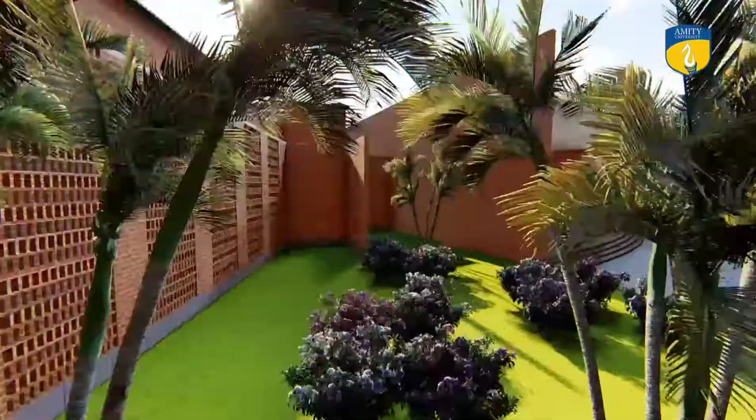My design thesis is about a School of Performing Arts, which is highly demanded in Bihar. Since there are no such facilities in eastern India, this proposed campus is the first in this region. This is not only a school, but this campus shall be catering to all the performing artists of Bihar to perform and also to interact.

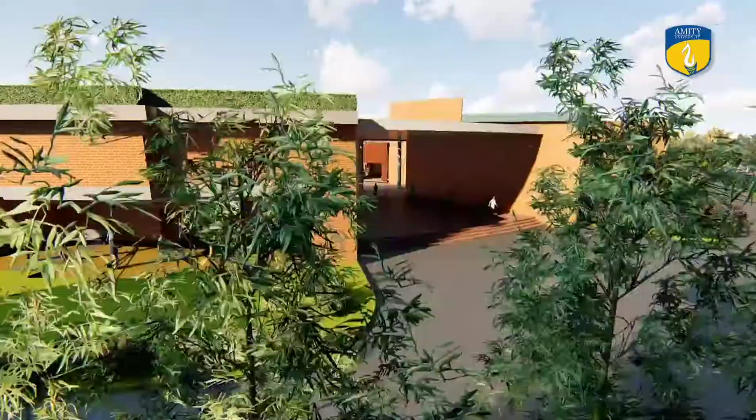Major international and national level theatre festivals, music festivals, and dance festivals can be held in this campus, as well as workshops can be conducted, and apart from that, libraries, archives, rehearsal spaces can be used by the theatre and performing art practitioners at local level.

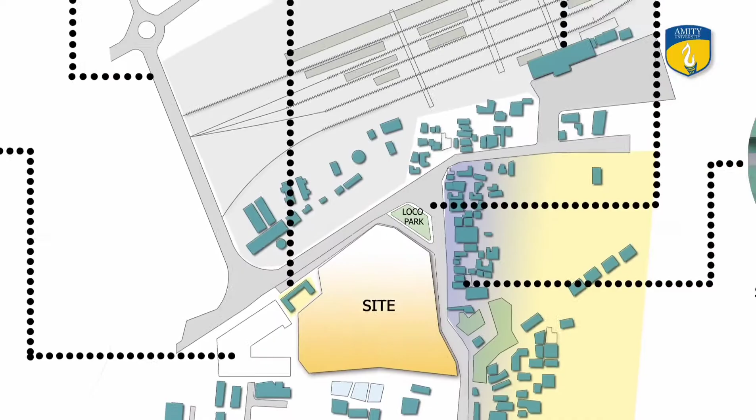Site is located in Patna and it's in a newly developed education hub at Karbigahiya. The main road is on the east, at the north is a flyover which gives a bird's eye view of the site. At the south is a driveway, and on the west, an old power substation. And at the north, an additional road adjacent to the site exists. The slide shows site analysis, sun path, wind direction, approach road around, probability of accessibility to the site.

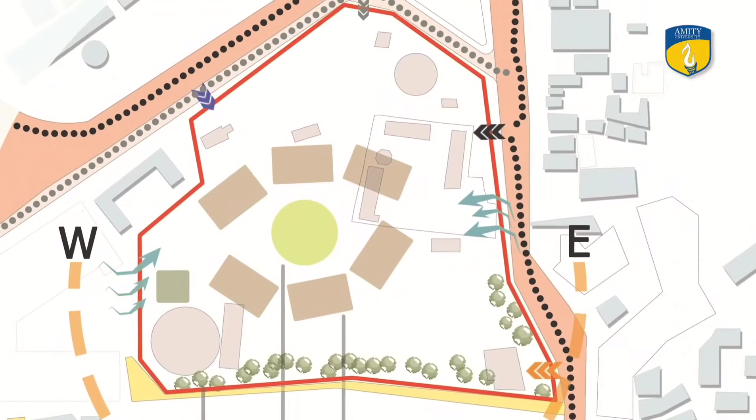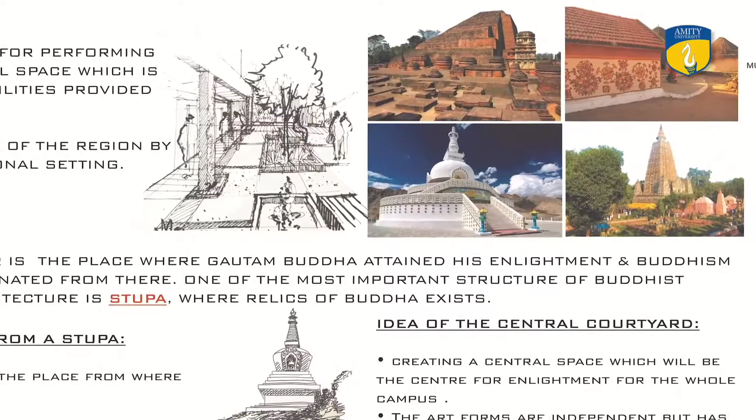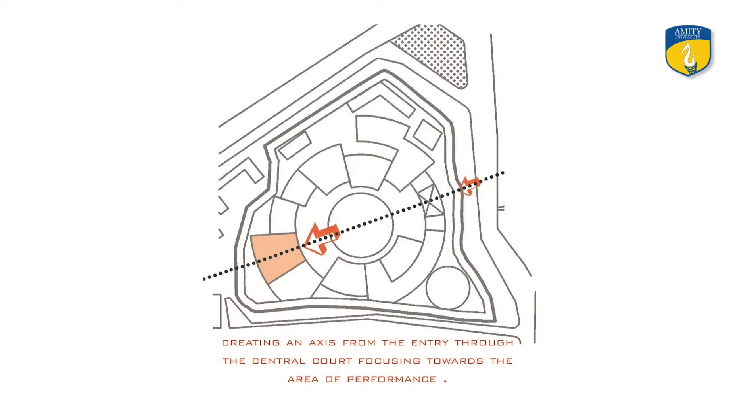Talking about the concept, inferences were taken from regional history, Nalanda ruins, Buddha stupa, concept of courtyards. These elements were considered in the proposed design. Exposed brick from Nalanda ruins, courtyard from the concept of stupa, which is a place, an origin from where the enlightenment begins. These are some design ideas I considered during the design process, like introverted planning, hierarchy of spaces, independent entries to the different blocks, converting negative spaces to positive ones, etc.

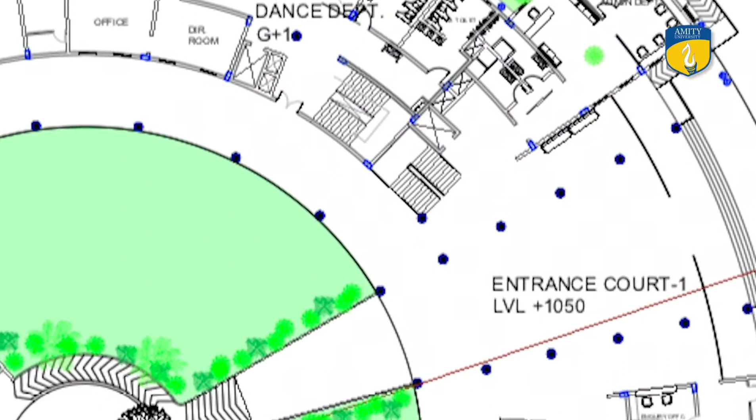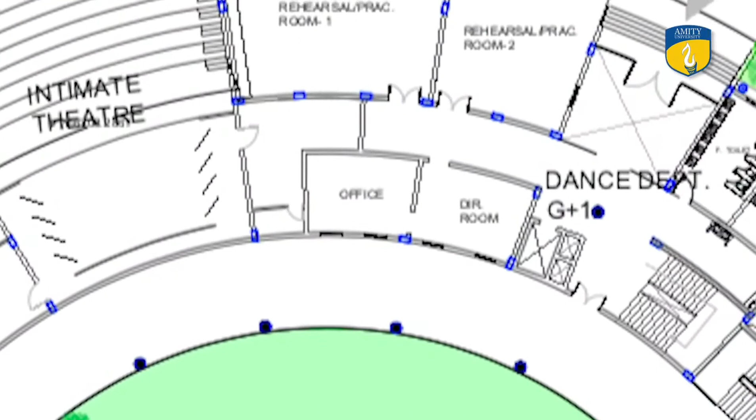This slide shows the basic zoning of the site and the circulation inside the site. Entry from the main road along the main axis is the entrance of the building, along which is the central courtyard. At the end of the courtyard, you can see the open air theatre, below which is the cafeteria connected by a semi-open corridor around the courtyard. This is the intimate theatre, and after that you get another entry to the building outside the block for the dance department. This is all a ground plus one structure building.

There is a two-wheeler parking space, and on the upper side you can see boys hostel, girls hostel, and in between there is a dining space which can be shared by both. This is the auditorium, and this is the entry to the drama and music block.

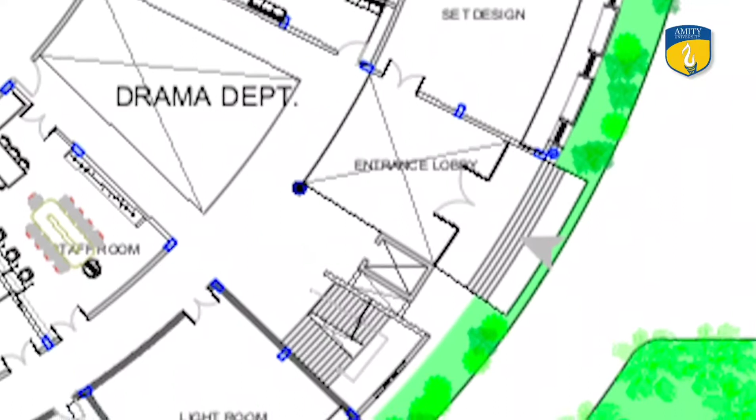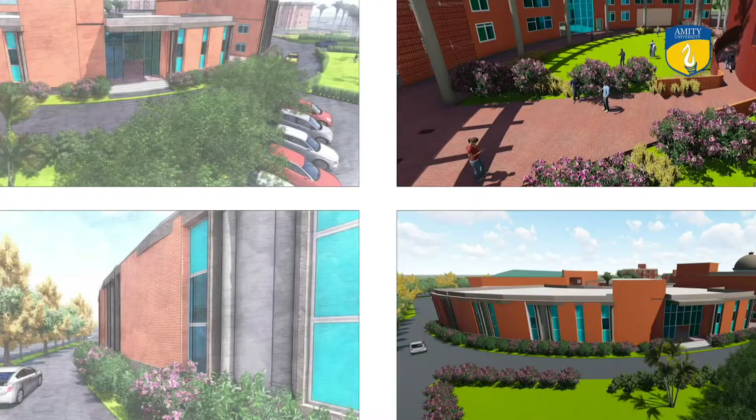These are some detailed drawings which are plans, sections, elevations and views of my thesis project. Entrance block, drama and music block, dance block and intimate theatre, central courtyard with OAT, green lawn and cafeteria, auditorium of seating capacity 500, boys hostel, girls hostel and dining area, faculty apartment.

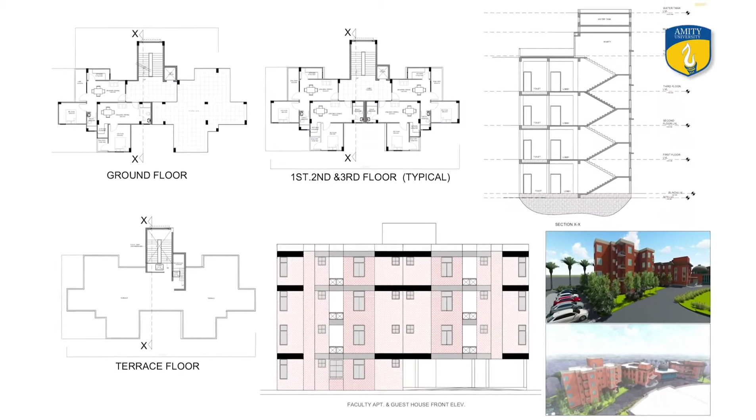So this was all about my thesis project, which was the School for Performing Arts.